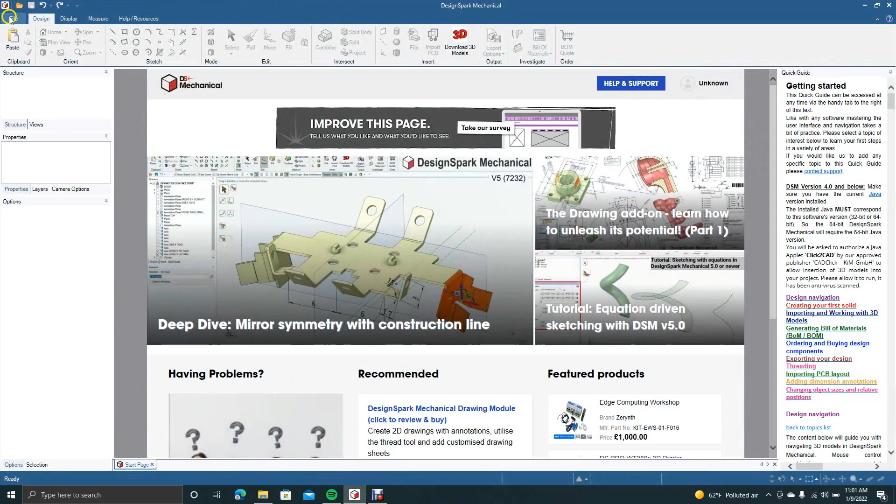We're going to be creating a butterfly sword, so we'll go ahead and open the program. Go ahead and create a new design, make sure it's in inches, and go to plan view. We'll minimize - I got a file here that we can use as a reference.

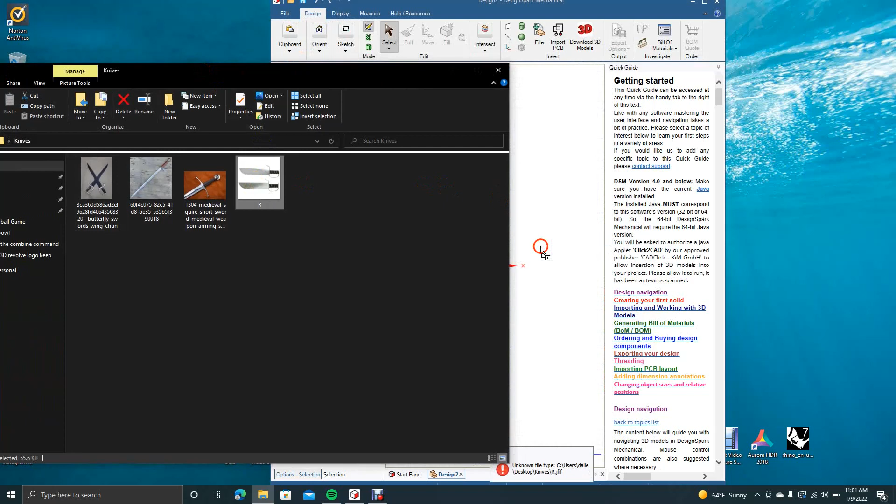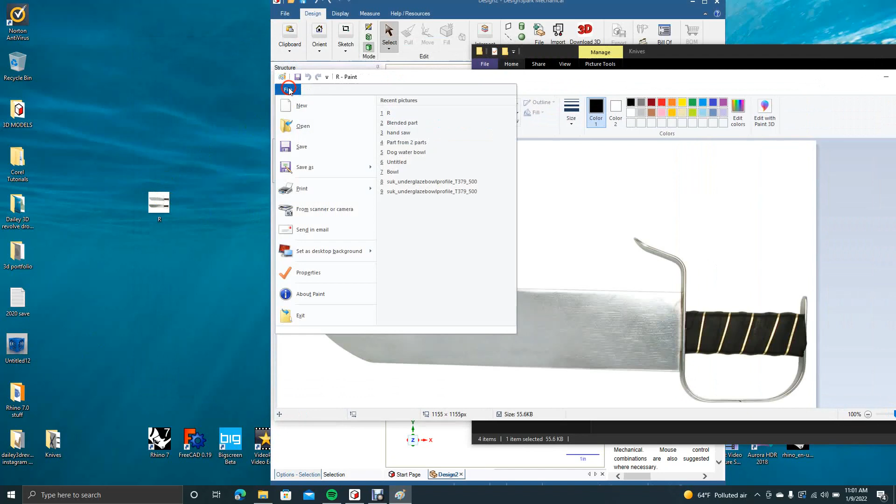Go ahead and move that in. It says it's not the right type. Okay, let's copy this to the desktop and open up Paint. This usually fixes the problem - we'll just drag this into Paint and resave it out as a JPEG. Okay, this should be better, this one should work.

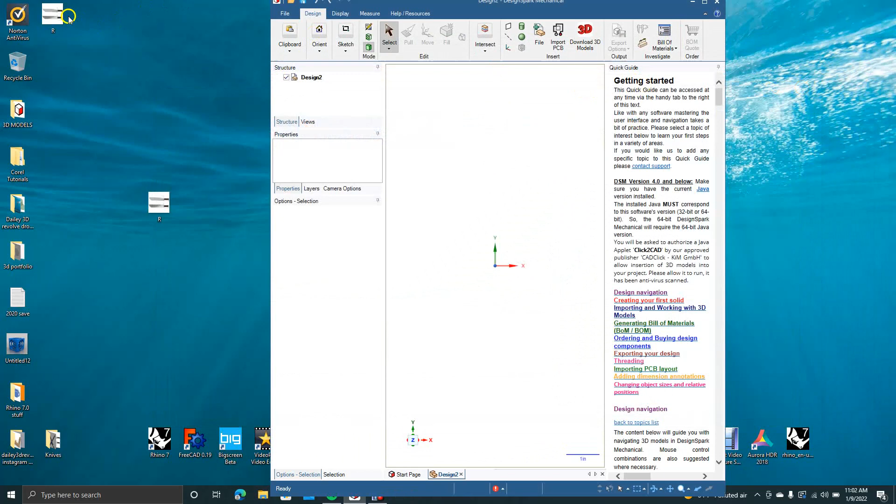Okay, now go ahead and get that graphic, drag it in, and then we'll blow this up. Okay, we're going to rotate this, so click on the graphic, click on Move, and then we're going to dial this in to probably whatever looks straight. I guess that's good enough.

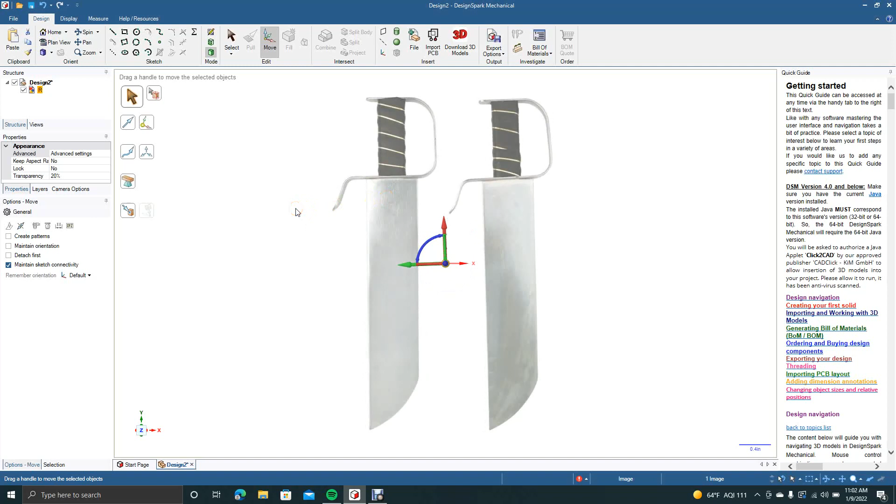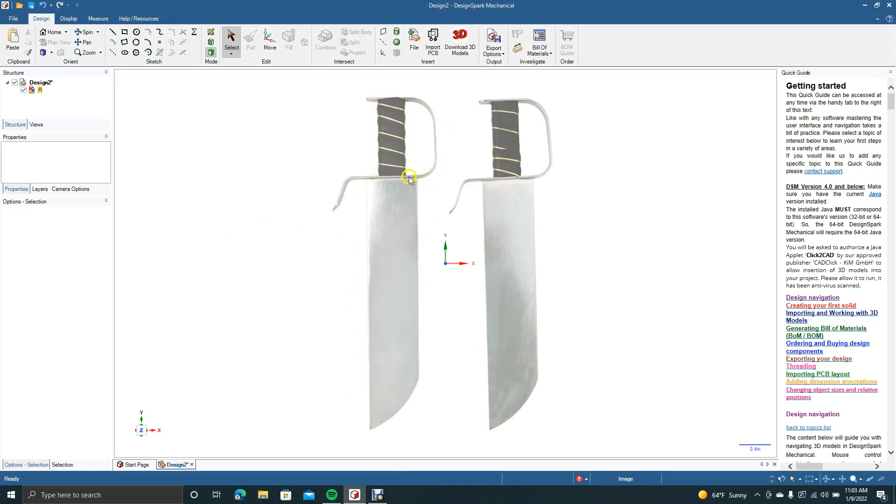Go do Control Plus to zoom in. Okay, so what we want to do here is figure out the parts that we're going to extrude and the parts that we're going to revolve for this. So the handle is really the only thing we're going to revolve, and the rest of it we're going to extrude. So we'll just start off by drawing with the line tool.

Come up here to select, click off, grab the line tool again. I'm going to come down to about there. I'm not creating this to scale - you could scale it up if you wanted to print it. Typically these blades are about 13 to 15 inches long.

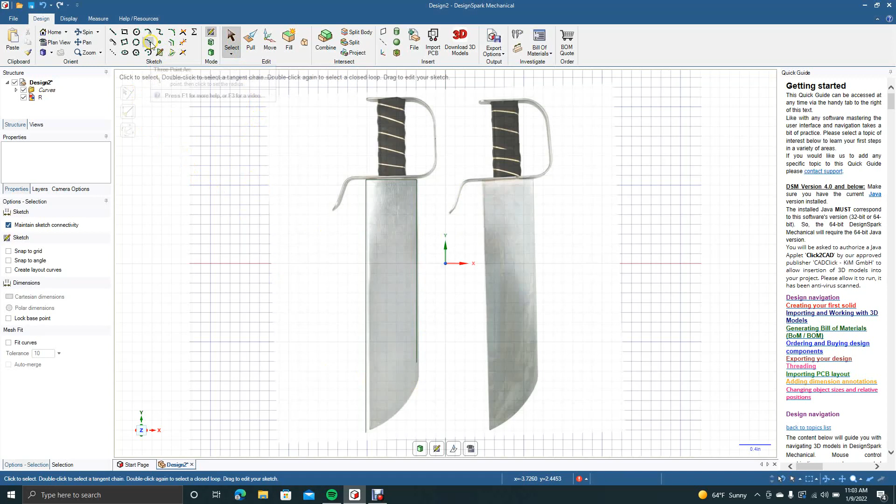Okay, now we're going to get our 3-point arc. We're going to go from there to there, bow it out till it's tangent. You know it's tangent when you got those two green lines on the line itself - that's letting you know that it's tangent. So this is going to be an extruded piece here.

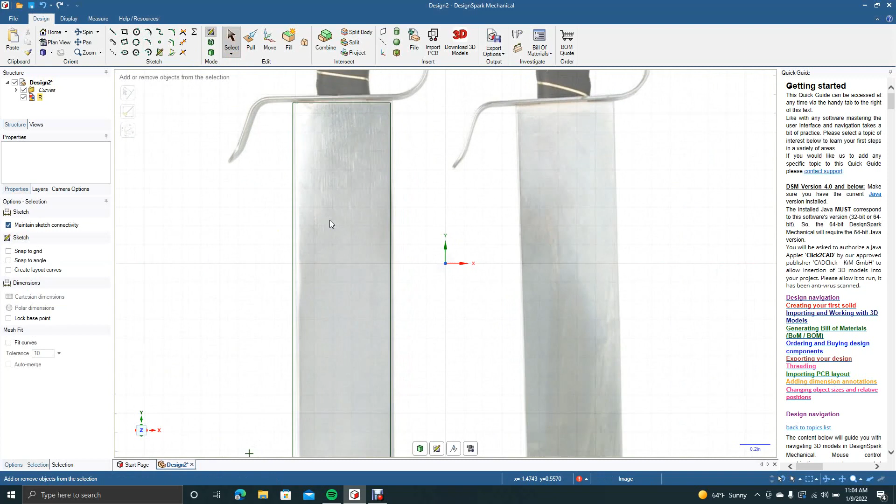So we'll go ahead and Control Plus to zoom in, and we're going to pan down. This I'm going to draw with one line, and then I'm going to offset that line. So we'll go ahead and start with this - we can add the fillets in later.

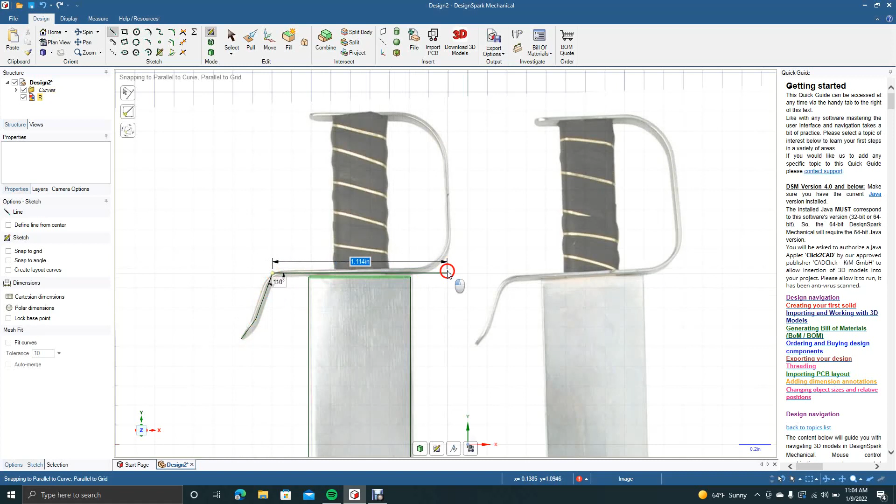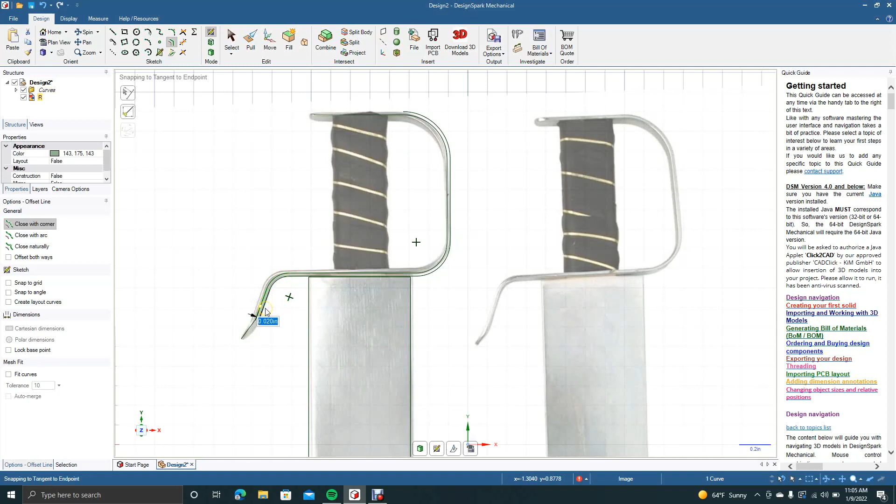Okay, this is the basic shape, so now we're going to go ahead and get our offset tool, and we're going to offset this way - we'll go 0.02, a small offset. Same this way, 0.02, 0.02, 0.02, 0.02, 0.02, and then 0.02.

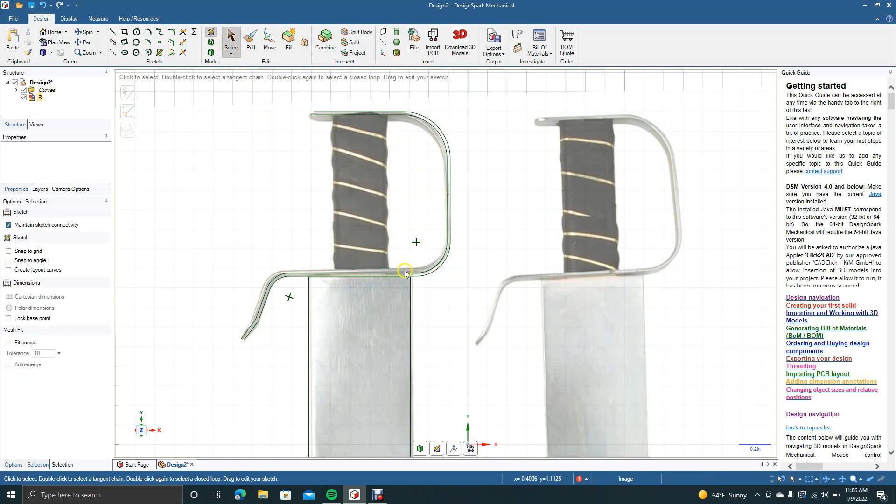Okay, now we got to do this one right here, 0.02. Okay, now I'm not sure whether I want to do one on the inside or not. Let's Control Plus to zoom in a little more, let's pan over on this. Yeah, I'm going to do one on the inside as well.

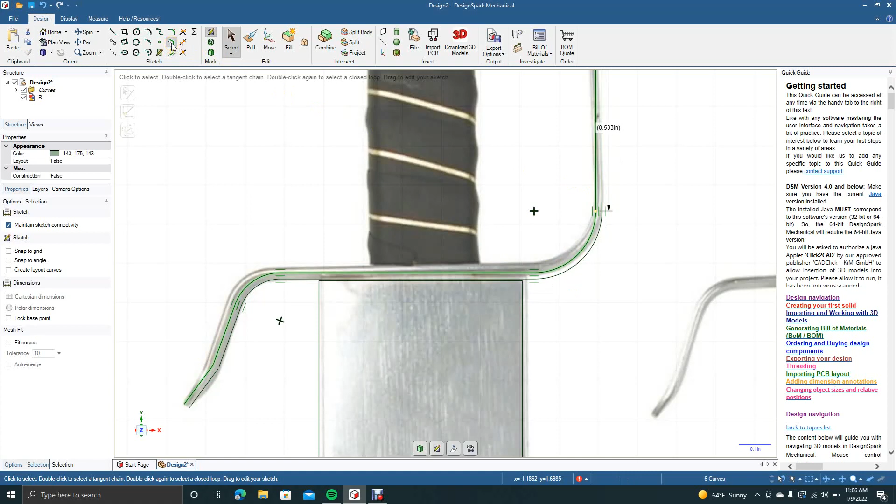So what we'll do is go ahead and get your select tool. What we can do to make this a little faster is hold down the Control key and get most of these lines. Grab the offset and then offset this way, 0.02. Okay, now we'll pan down, get the ones that we didn't get, that we missed.

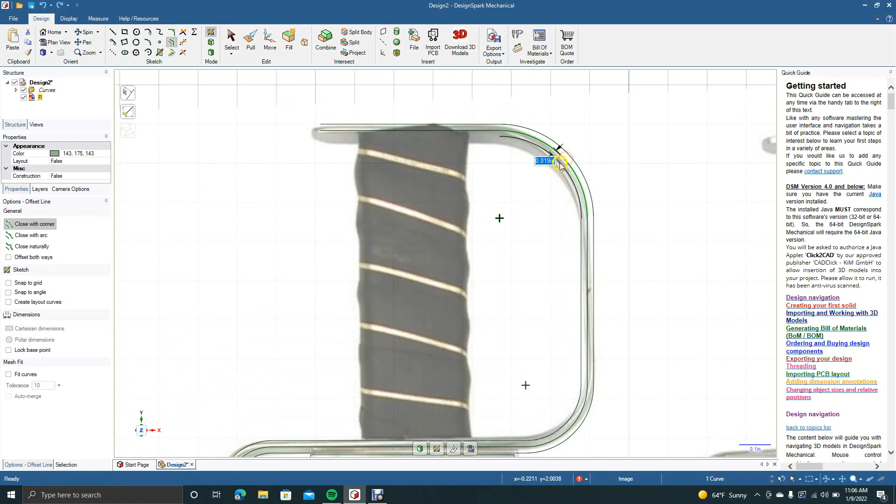Offset curve - let's undo that, it accidentally added one when we didn't want it. 0.02, 0.02. Okay, so that's going to be our rail, or our handrail.

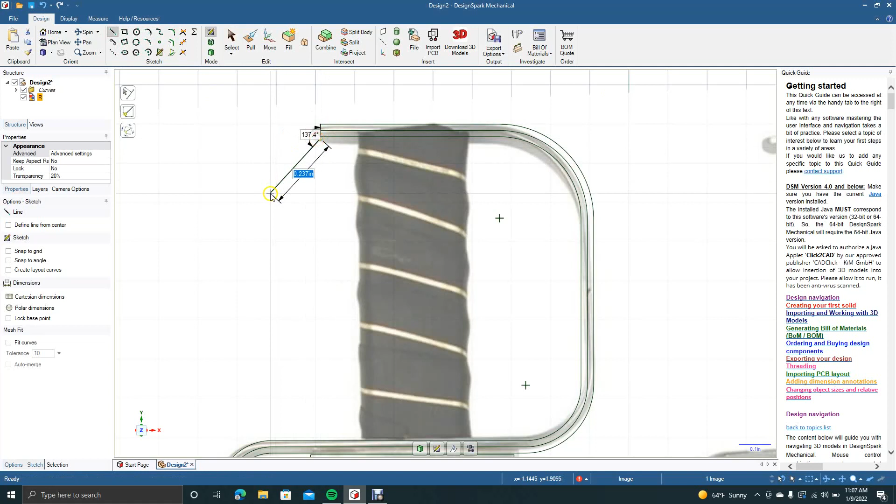Now what we'll do is go ahead and cap this off here, so we're going to go from endpoint to endpoint. Click on select to click off. Now we're going to pan up, do the same thing over here, grab the line tool.

Go from endpoint - let's hit, I got the wrong one, hit select, let's grab our line tool. Go from endpoint to endpoint. Okay, this one needs to be extended, so we'll go ahead and grab this tool up here, create corner.

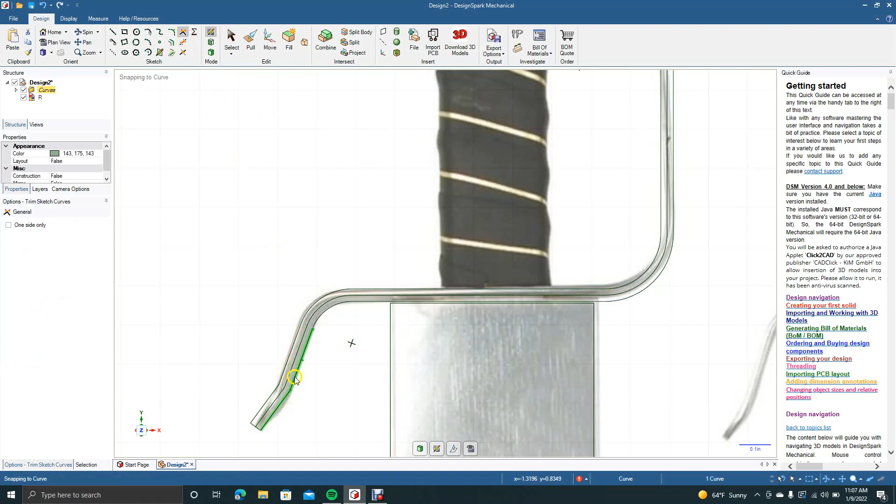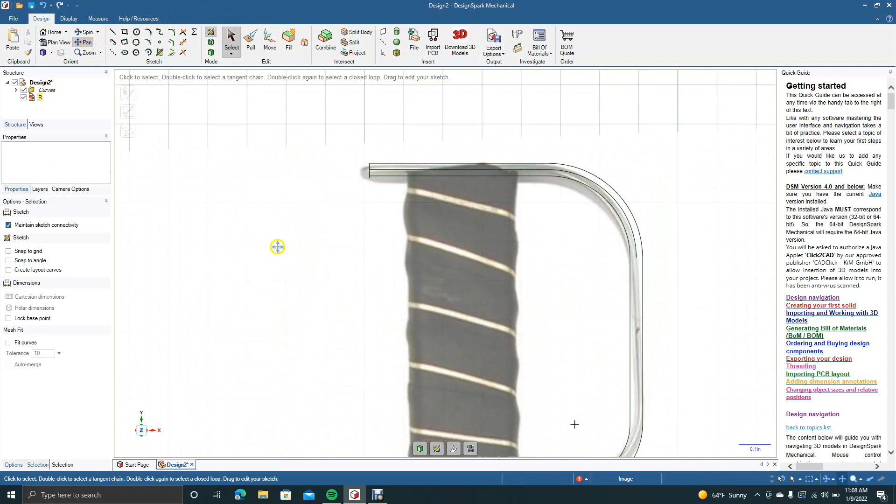Now we're going to go ahead - we don't need this one in the middle, so we'll go ahead and get rid of that. Hold down the Control key to select all the lines. Let's pan down, get our select tool.

Get rid of those last two. Now we got to trim that little piece right there, so Control Plus to zoom in, get our trim away tool.

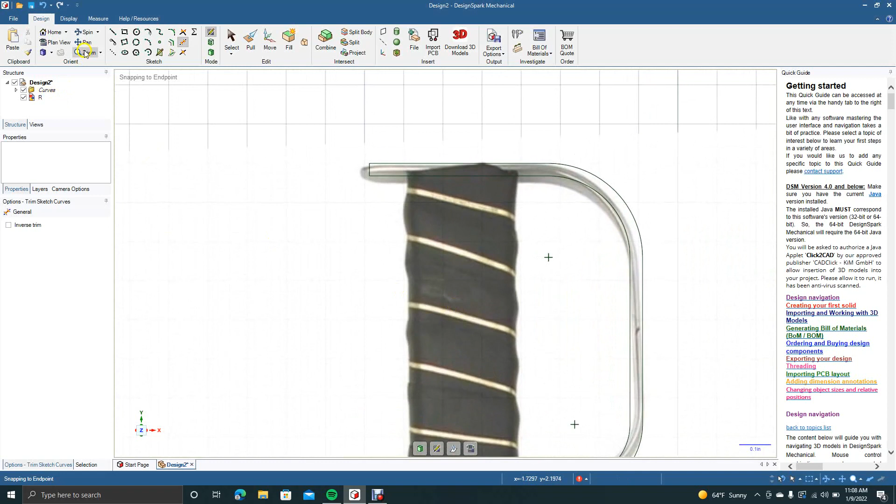Control minus. Okay, now we're going to draw half of this, so let's do Control Plus to zoom in, let's pan up a little bit. And we can actually use a square, so we're going to go from here down to here, and then we'll just revolve this over.

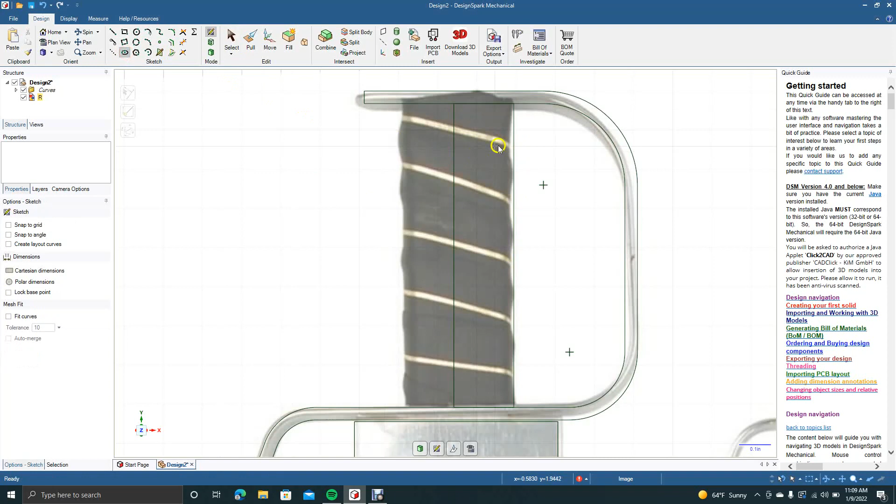We could put these little indentations in, but yeah, why don't we go ahead and do that. So we're going to go ahead and get our ellipse tool, and then we're going to put one of these in here.

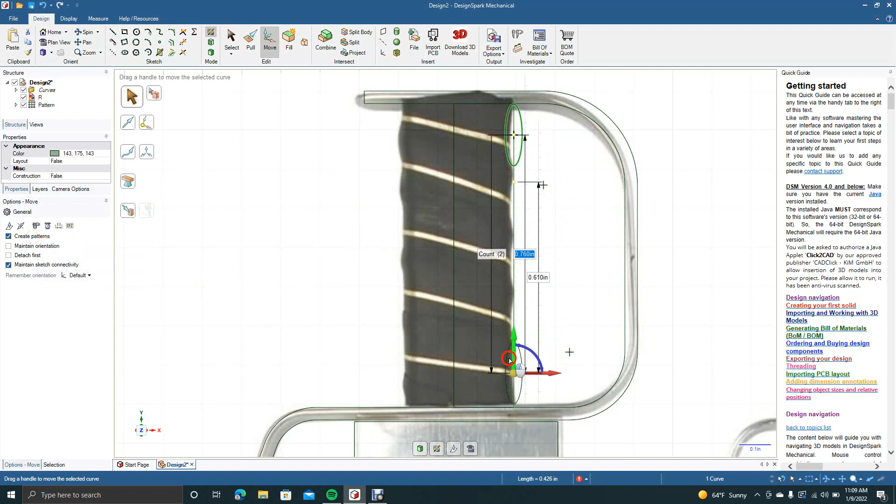Let's try about there. Get our move tool. I'm going to move this up a little bit. Now I'm going to come over here and go create pattern. I'll throw this down here, and on the count we'll put 4. Go ahead and select, click off.

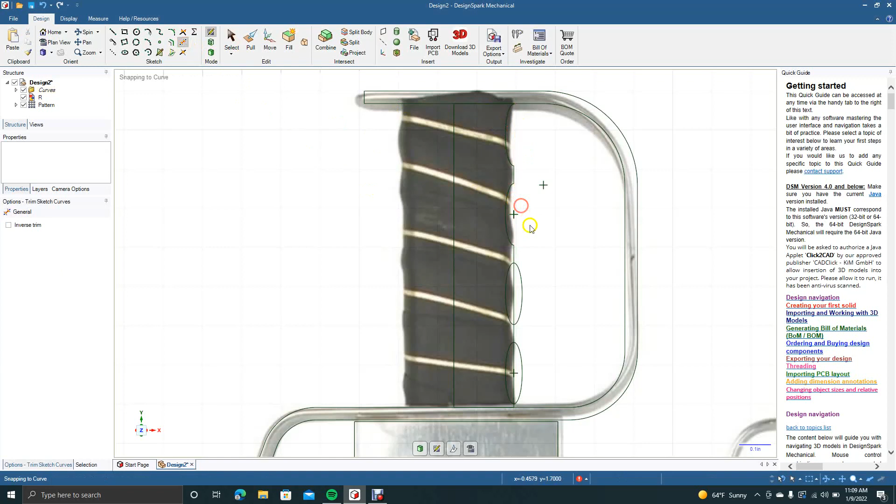Now we want to trim this stuff. Go ahead and get our trim away tool. Trim away the center and then the outside piece, repeating for each section: center, outside piece, center, outside piece.

Now we're going to put a little cap on these. We'll go Control plus to zoom in, get our pan tool to pan over. We're going to use the 3-point arc for these, going endpoint to endpoint. We'll come down just a little bit, 0.05. That should be good.

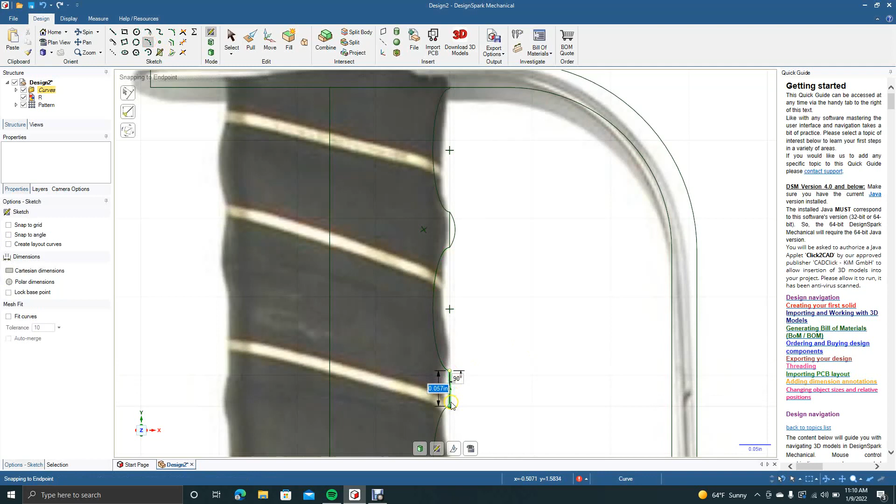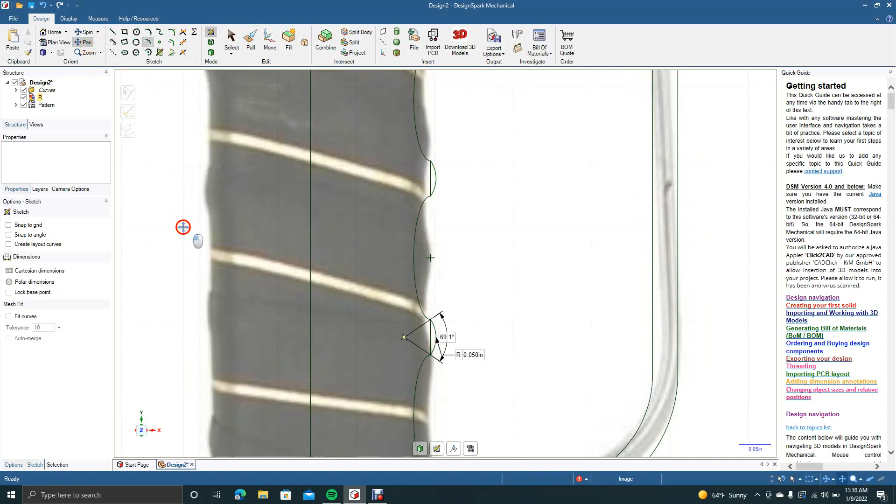Grab that one again, 0.05. Grab our pan tool. Three-point arc, 0.05. Pan up. Okay, that's going to be all of them.

I'm just not sure that I like this right here. I'm going to get rid of those and try another one with a 3-point arc. We'll go from there to there. That's better. Move it till it's tangent, which is 0.173.

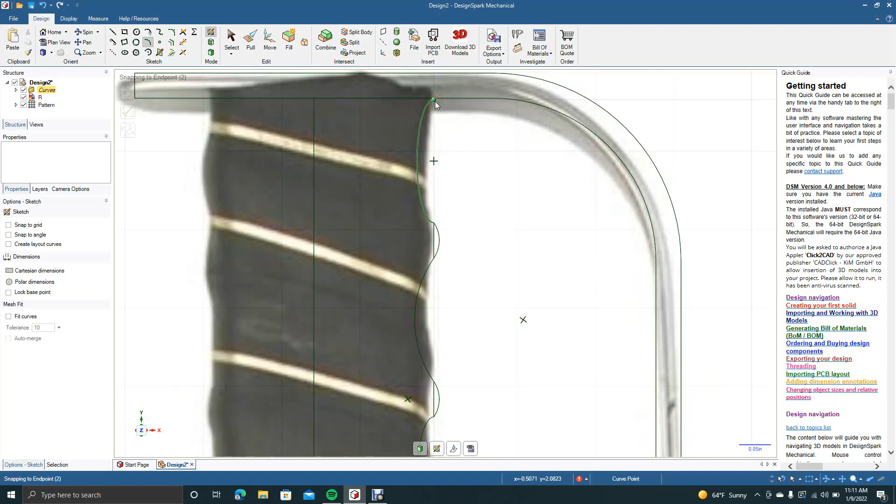Okay, now we'll do the same. Let's get rid of this one too. We'll come from there to there. All right, looks good.

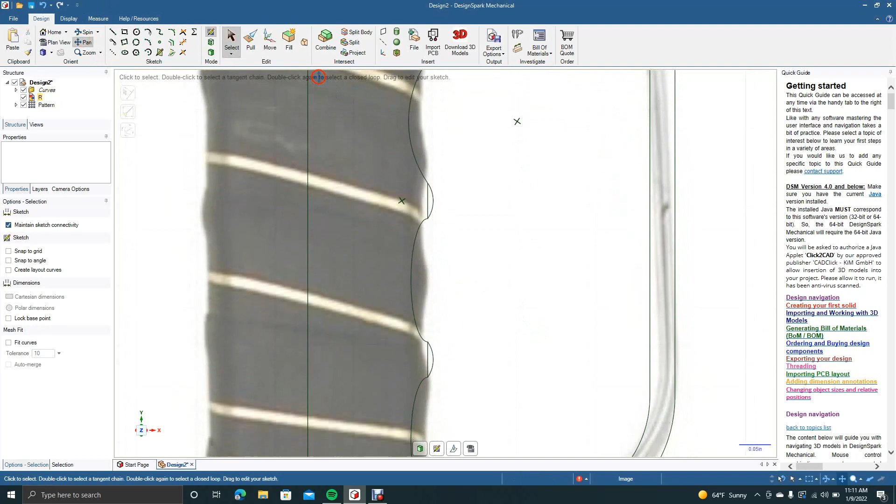I'm going to get rid of that line, don't need it. I'm going to pan up a little bit. Let's get rid of this line here. Get our 3-point arc, going to go from there to there. Move till it's tangent, 0.173.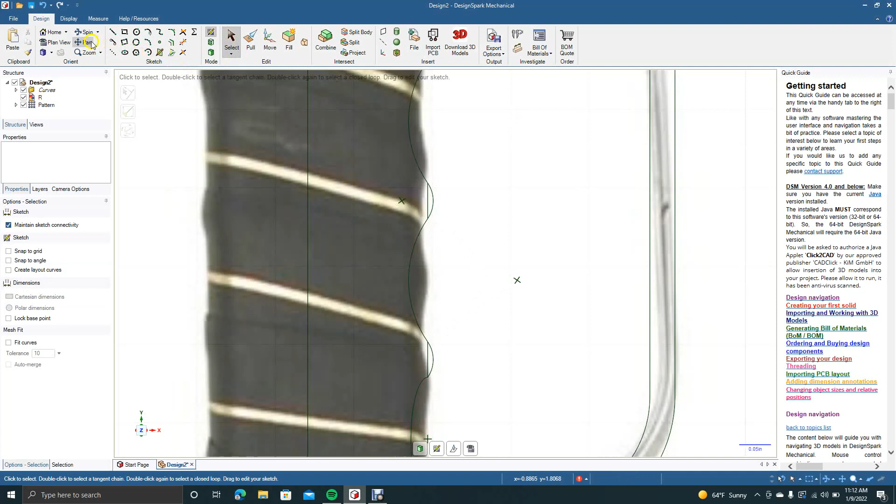Now we're going to pan down and do the last one. Go ahead and select, click that, delete. Then we'll go from endpoint to endpoint. Okay, that looks pretty good.

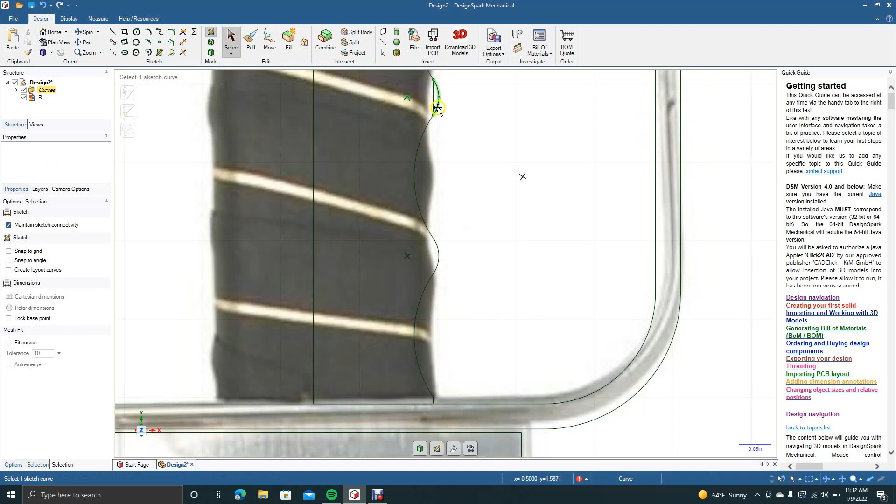Now we're going to go ahead and get rid of these, don't need those. Let's pan down. Get select tool, click on that, delete, tool minus. Okay, now we have all our elements here.

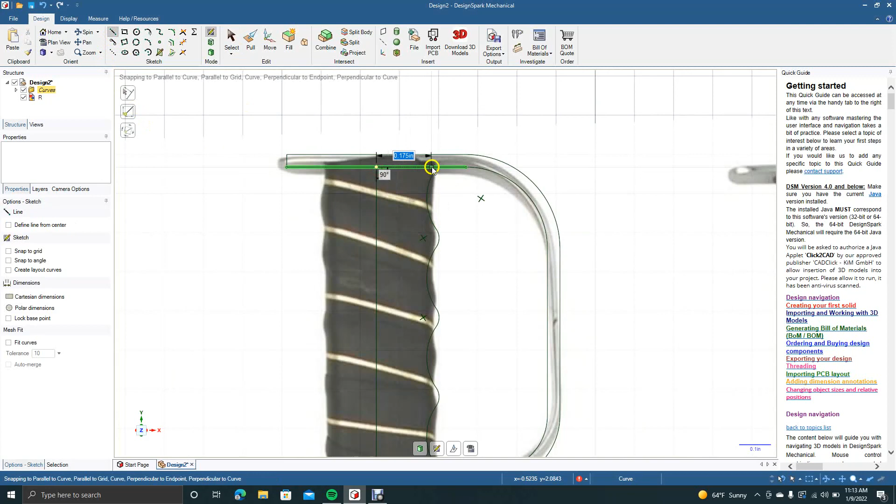Let's cap off this piece if we didn't already do so. Scroll, pan up. Let's go ahead and cap off this. Okay, now we're ready to transform this, so we'll delete the graphic.

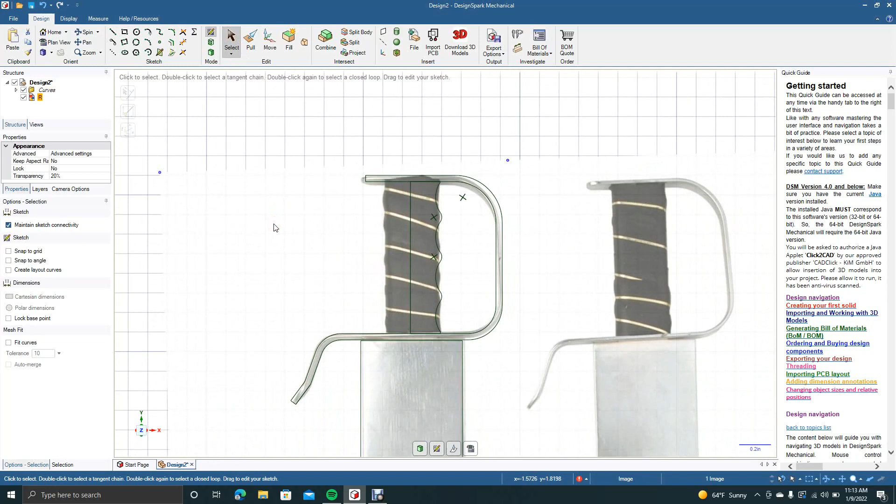I'm going to go ahead and pull. I'm going to get rid of this in the middle, don't need it. I'm going to click on this, come over here to the revolve. We're going to revolve it from here, then select full pull.

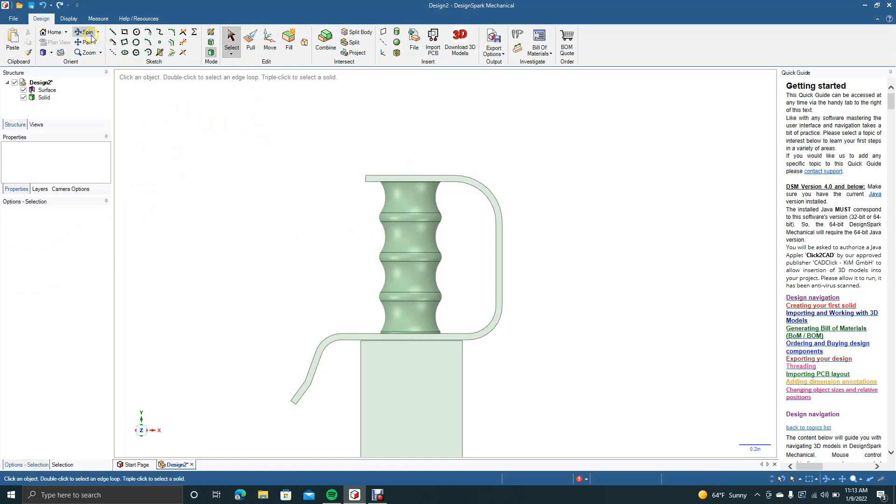Okay, that's going to be that piece. Now we're going to spin it, see how wide we are. Okay, now we're going to go ahead and pull. We're going to select this piece here, and change this to both sides.

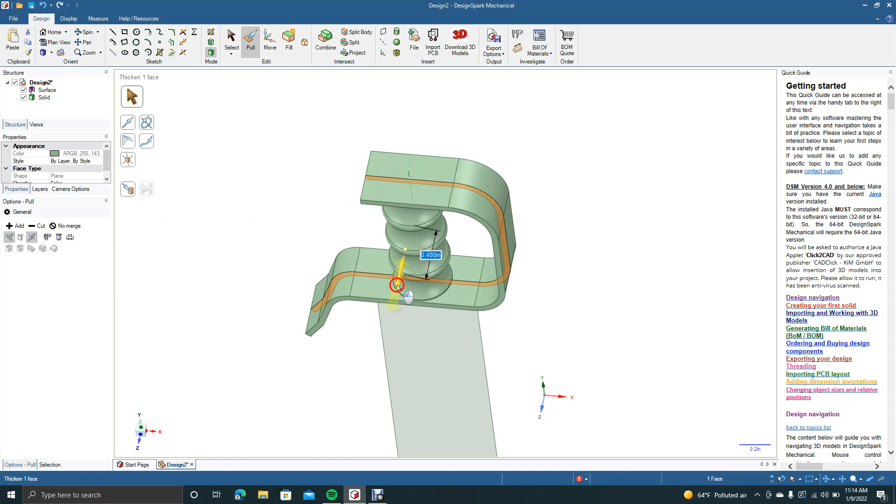And then we'll do this, 0.4. We'll put a fairly thick guard on there, and then we'll spin this around. What I want to do is put a fillet on the corner there so these are round.

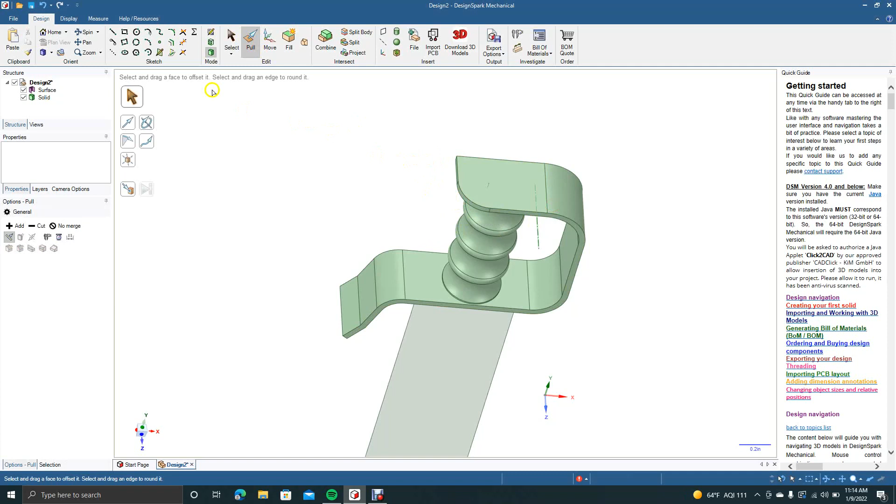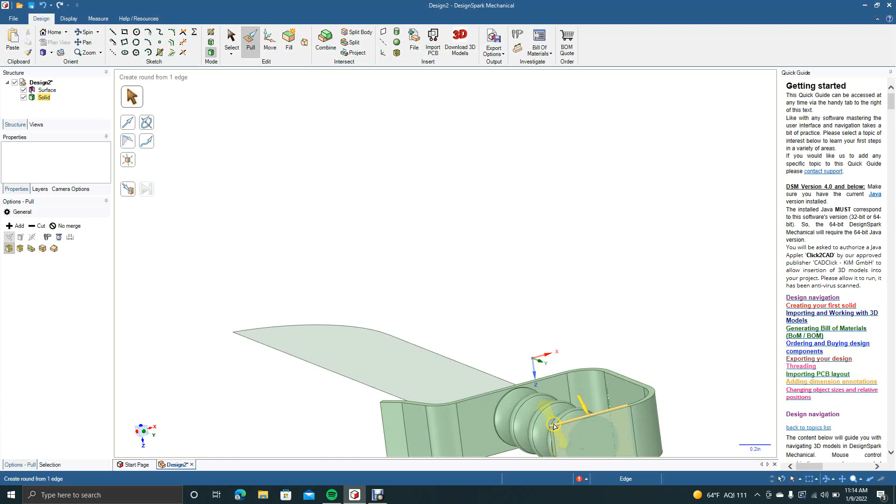Gonna have to zoom in, Control plus. Let's get our pan tool. Let's get the pull tool again. There we go, just drag out till we get to 2. Okay, that's good. Now we're going to go ahead and go to the top view.

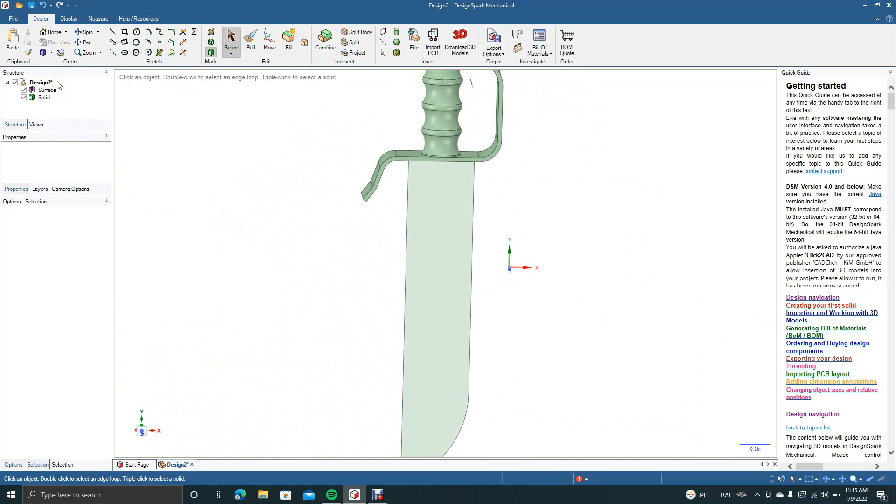Okay, now we'll give this a little spin. We want to pull this blade here. We'll click on the blade, we'll say pull from both sides. Maybe 1. Okay, so 1.1. I'm going to make sure this looks good.

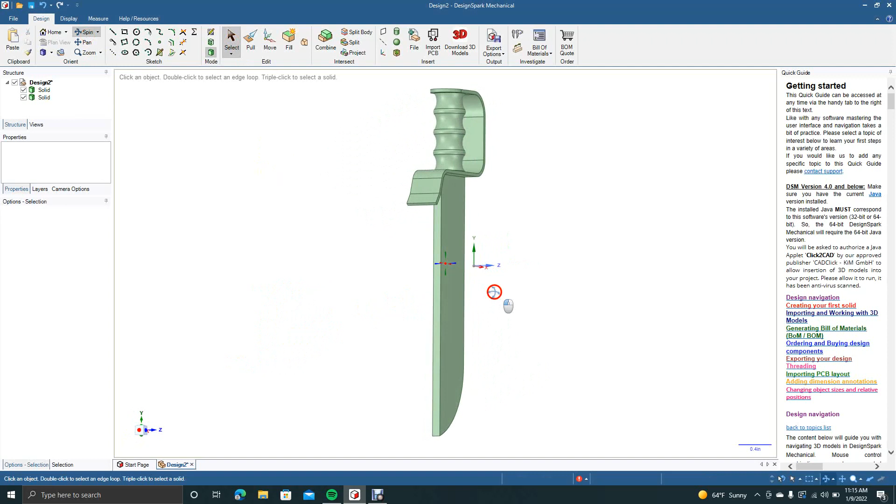All right, now I do want to put a circle on that and fillet there, so we'll zoom in. Pan down. Grab our fillet tool. Might not be able to go up as far as we did on the other one. Let's go 1.2.

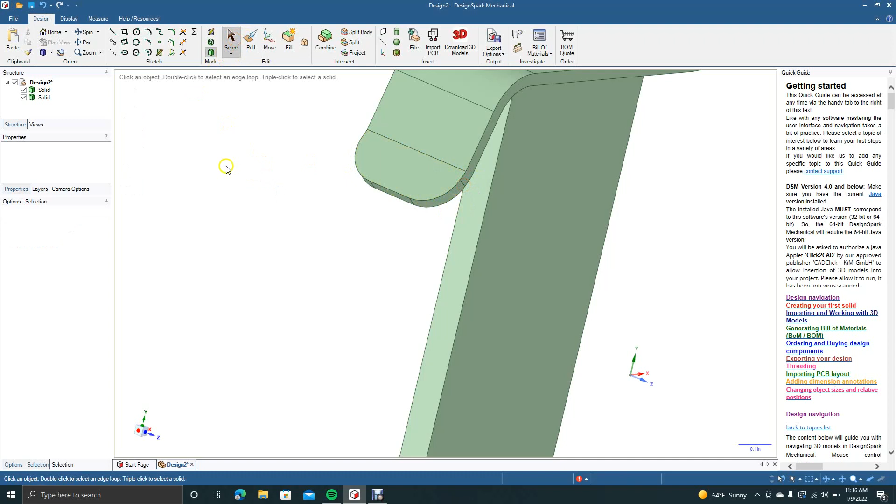We'll do the same there, 1.2. Let's go to view top. All right, don't look too bad. Okay, now we're gonna spin here. We're gonna put our edge in this.

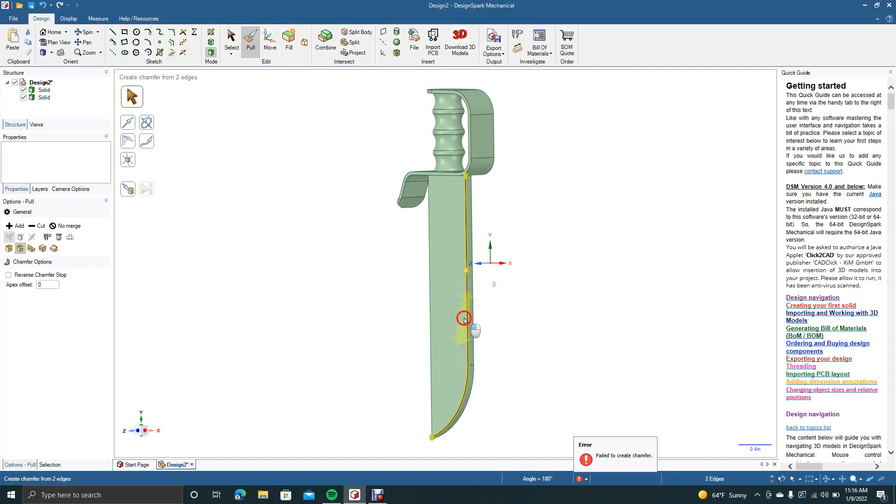So the way we want to do that is hit pull. We know that it's 1, so we're going to click on that, hold down the control key and get that one, and then we're going to come over here and change it to chamfer, and put a chamfer in here. 0.5.

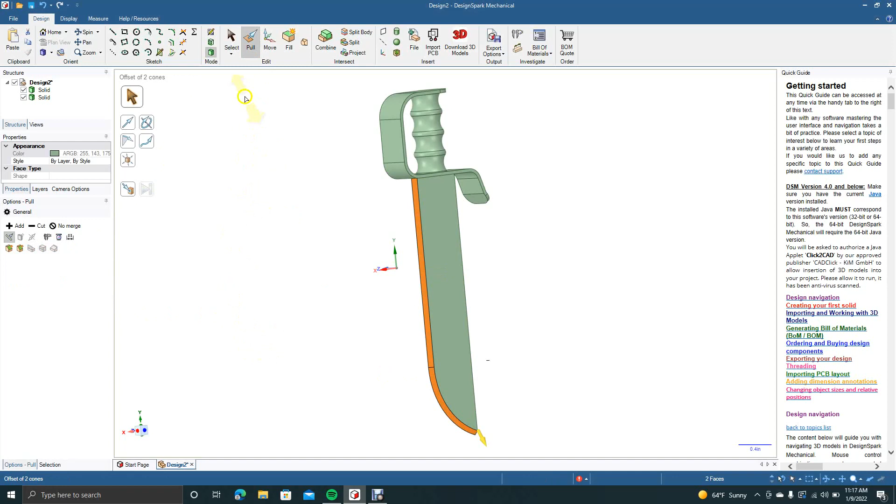Okay, now we'll spin this around, do the same on the other side. Grab our select tool, hold down control key, we'll say pull, change the chamfer, type in 0.05. Okay, looks like we got our

butterfly sword. Not going to put any kind of thickness over here on the back. The blade might be a little thick, but I'm just going to go ahead and keep it. It's not too bad, I don't mind it.

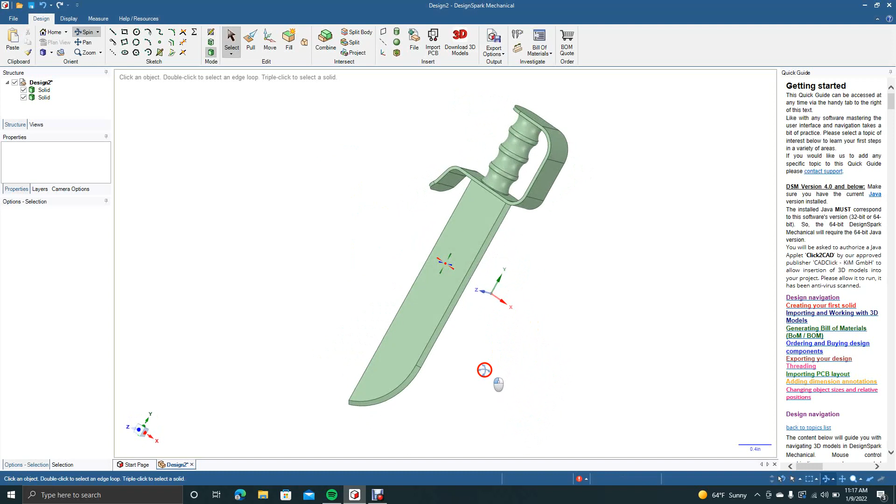And then what we could do is go ahead and view from the top. We can select all, say move, and then create a pattern, and just duplicate this because usually there's 2 in a set. We'll go ahead and move that over 1.5 inches. There's your 2 butterfly swords. We'll pan that over into the center.